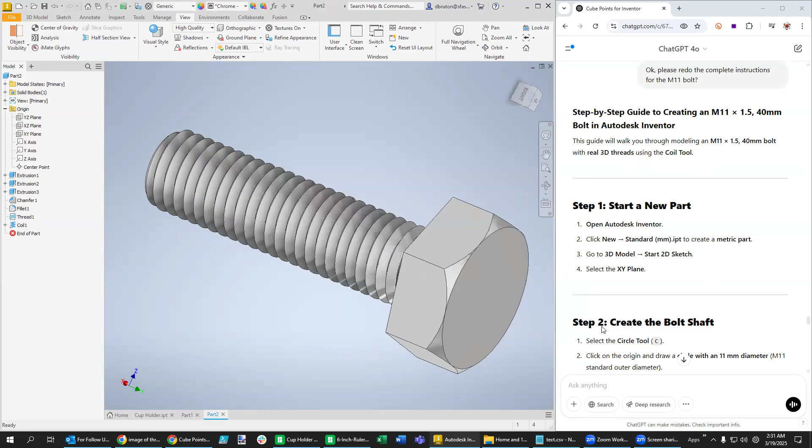So I'm going to follow these along, and we're going to go to metric and use millimeters for this one. The first thing it says is use the XY plane, so we will follow this exactly. So the XY plane, they have over this direction.

And the first thing we want to do here is create a circle. I thought they were going to have us do the hex head first, but it looks like we're going to do the circle first. And since this is an M11 bolt, they're going to have 11 millimeters for the diameter of that shaft.

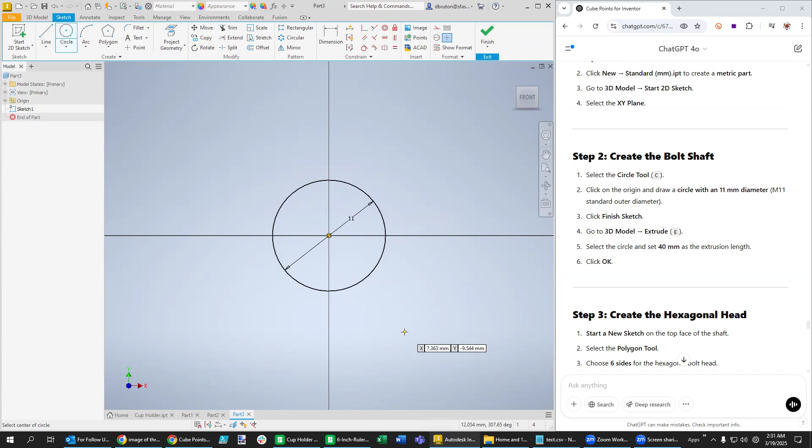And it says then you want to extrude it a distance of 40 millimeters. All right, I guess that's the basics of the shaft.

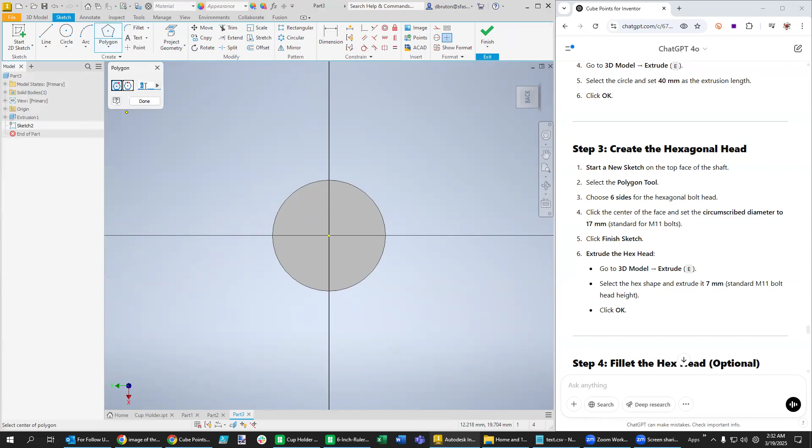Looks like we're going to put the hexagonal head on next. So let me orbit around here, start drawing on that surface. And let's put the hex head on there. Of course, that's located underneath the rectangle tool right here. Make sure it says 6.

And then lock in here, lock up there. And let's see what size we're looking at. All right, it says we want to do 17 millimeters from here over to there. And the reason it says that is circumscribed a diameter to that. So I wonder if we do this and then we type in 17. I guess maybe it's 17 across here. Oh, it's the same thing.

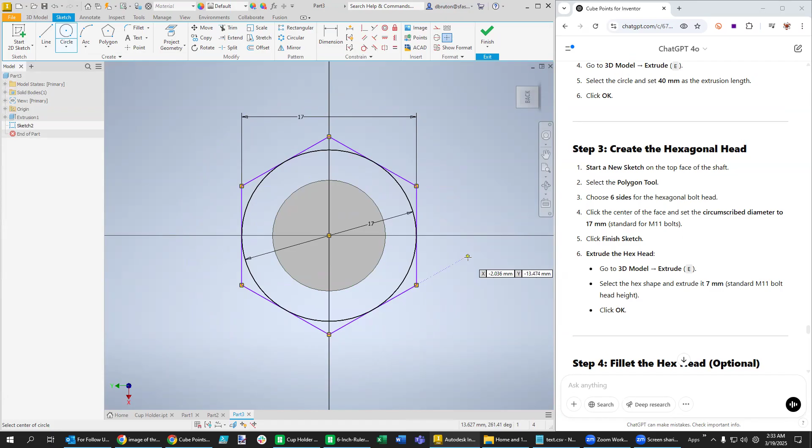Okay, so it's kind of good that I left that there because I want to do something else with that circle in just a moment. So it does look like it's not fully constrained. Let's see if we can find out why. We can say show all degrees of freedom. And it looks like maybe it's just not centered at the origin.

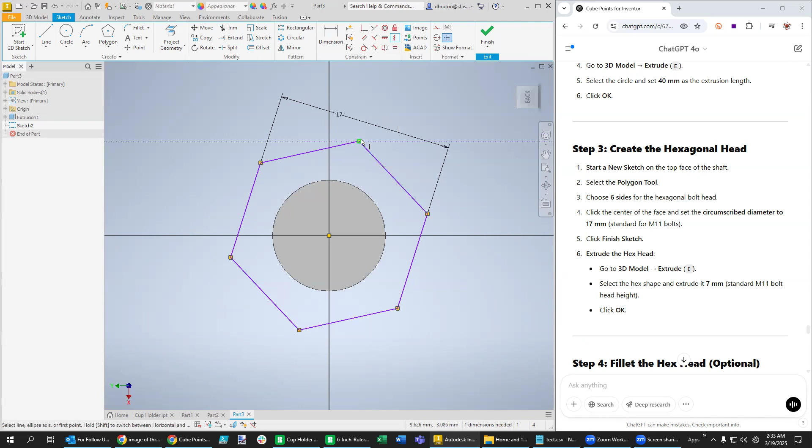So let me undo that and then see if I can move the thing around. What is it that's okay, it's being allowed to rotate. So what we can do on this one is click probably like coincident, or I think vertical might do it. Let's try vertical constraint with this one and that one. And at least that lined it up in one direction. And now you can see on the lower right-hand side, it's fully constrained.

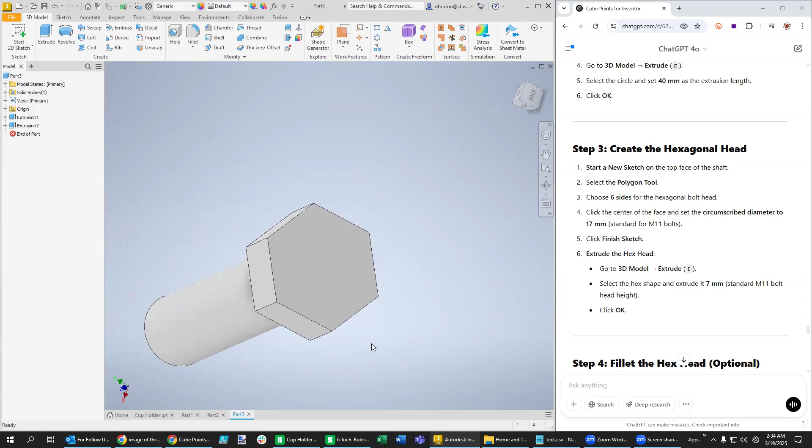Now let's go ahead and extrude. We're going to extrude that only a distance of 7 millimeters for the hex head on this. And we want to give it a little bit of style here. So first of all, let's change the material. The default material, let's change this to polished chrome. So there's chrome polished, it's going to give it a shiny appearance at the end.

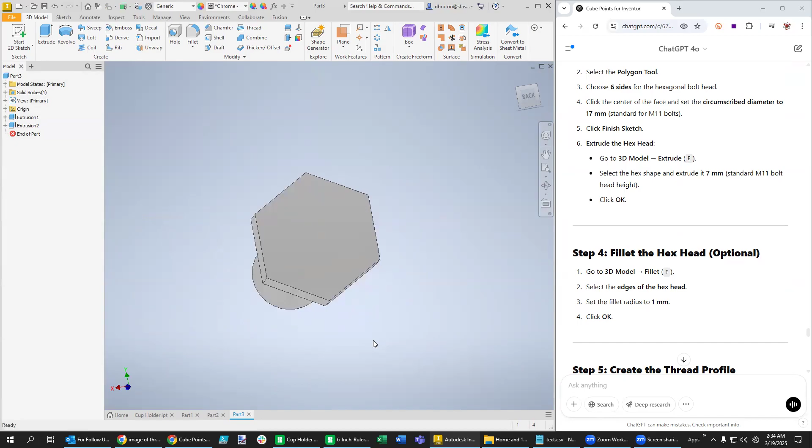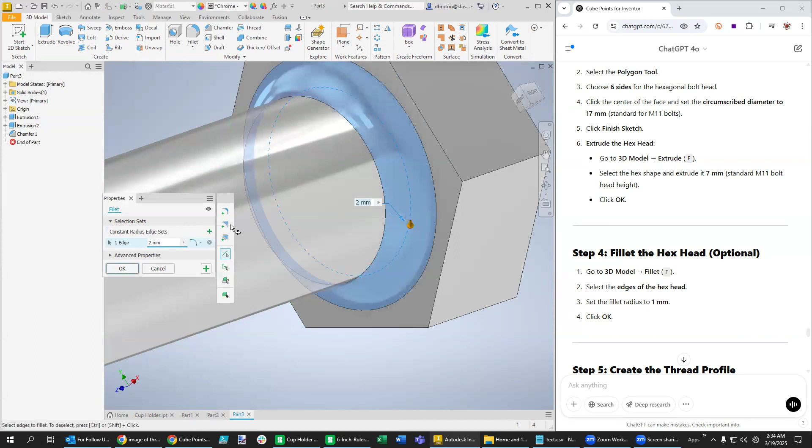And also it kind of describes, I think, some using fillets and things like that. But let's do some of that, but I want to do something a little bit different. So out here at the end, it says that we can put a chamfer out here. Notice you don't have to go up here to select the chamfer, you can just click right there. We're going to do a 1 millimeter chamfer. Then down in here at this intersection right there, we're going to do a fillet instead, and we're going to put a 2 millimeter right there.

Let's give it a little style on top of the head. We don't often see heads that are that sharp, so we're going to use that inscribed circle method. So we're going to do a new sketch right here, and we're going to put a circle and go all the way out here to the edge. And hopefully that's fully defined. That's good.

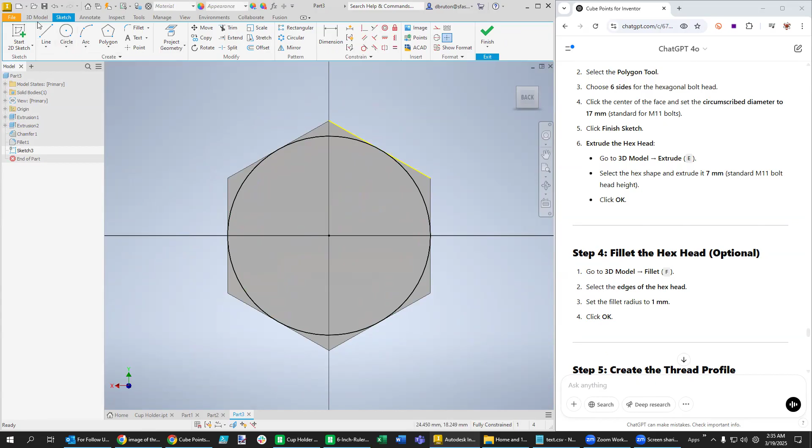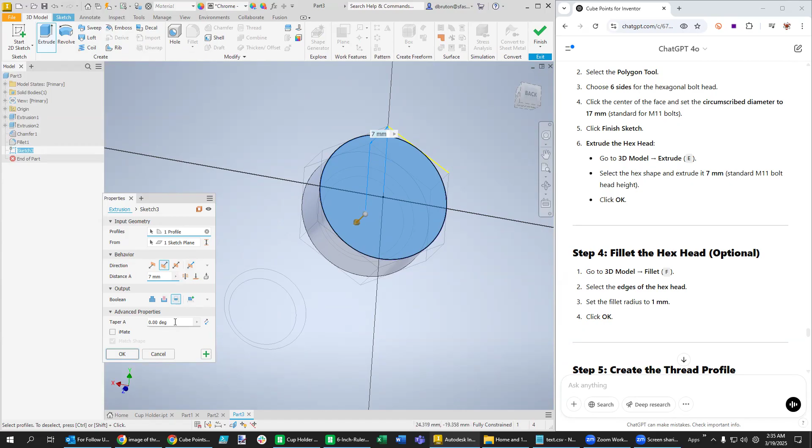And then we're going to use the intersection tool under the extrude. So we have that shape right there, but we don't want to select extrude or cut, we want to do intersection. And what we want to do is flare this out so it kind of takes off a little bit of the edge. So that means under the advanced properties, we can use, I'll put a 45 down here. And you can see that it gives that classic look that we see at the top of bolt heads when we do that.

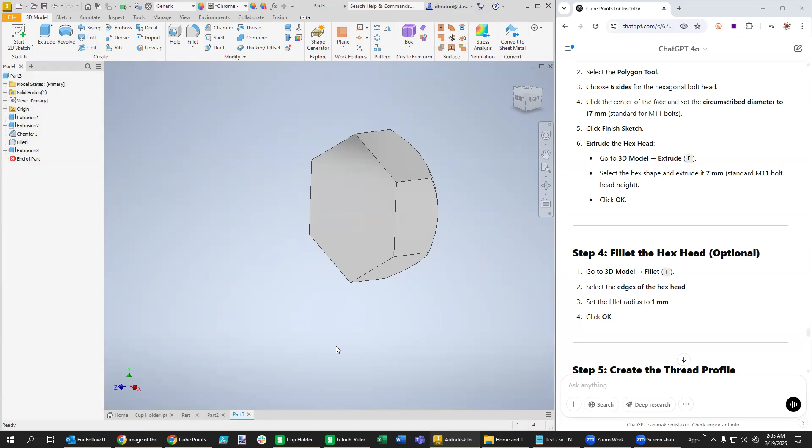So I used the intersection tool, but it looked like I got rid of the shaft that was below that. I guess I should have done this one first then, but that's okay. I guess we can do them out of order or just go back and put it in play. But it does look like that operation... let me see if I can verify that.

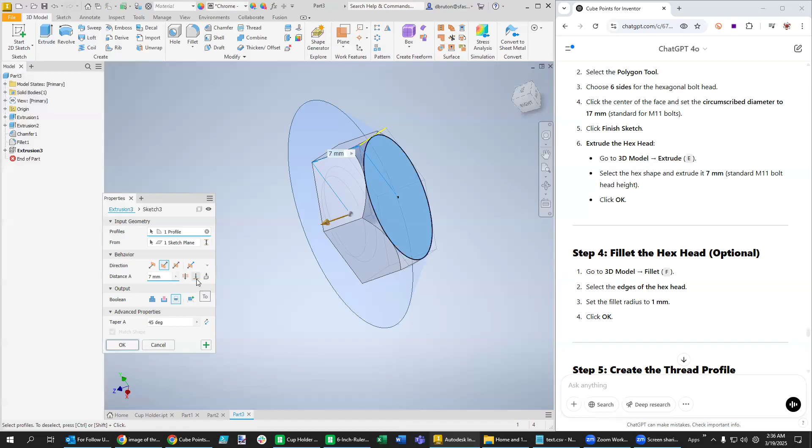Yeah, it looks like it just went all the way through. Maybe I can tell it not to go all the way through, but just to go up to a certain distance. Oh, hey, yeah, how about this? We go all the way through like that.

Okay, now we got the whole thing in play. Looks a lot better. So now, I guess we can put the serial number on top of that and make it even look more realistic, but it's time for the threads, of course.

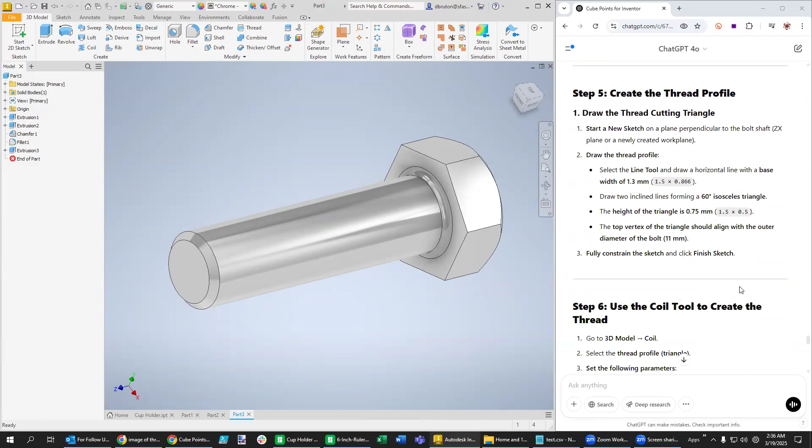And so when you go down to the threads, you could put cosmetic threads on there, but we're going to use the coil and a triangle to cut the threads. So let's face one of these planes. How about, yeah, that one right there. We'll start sketching on that one.

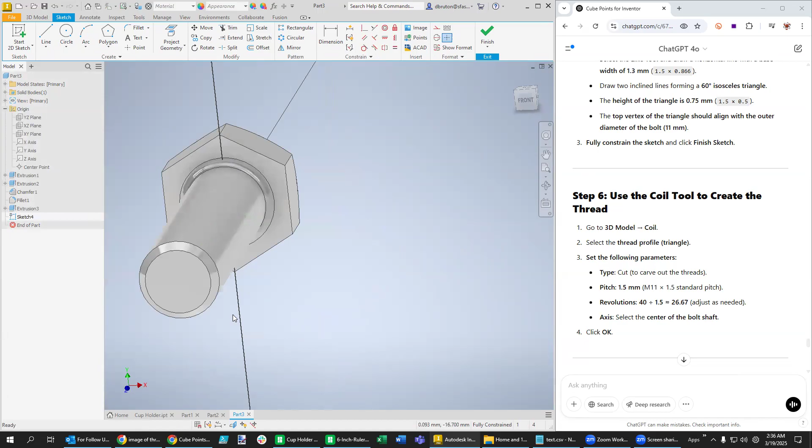And what we want to do is go over, yeah, I forgot to, let's see, one on this plane here. I just want to pan over like this. And I'm drawing on this plane, hopefully. I'm going to start by having just a construction line that starts here and goes out this way. I guess I do need to make that a construction line.

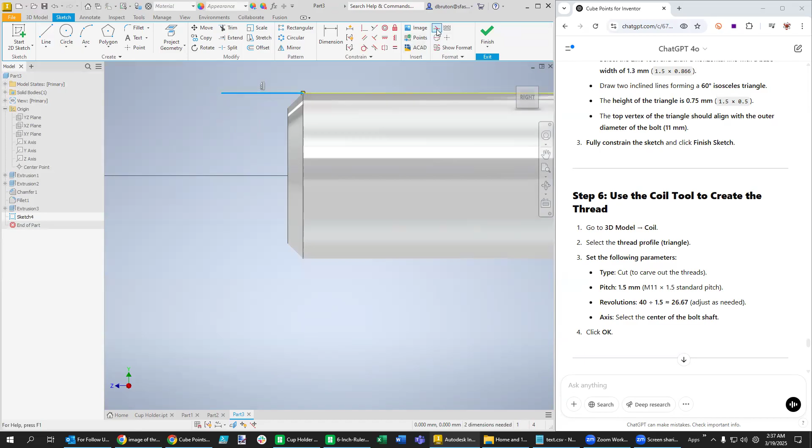And then what we want to do is make a triangle that's going to perform the cut. And hopefully I can get it to line up there. And of course, we want to make these two equal. So let's do that. There's the equal constraint.

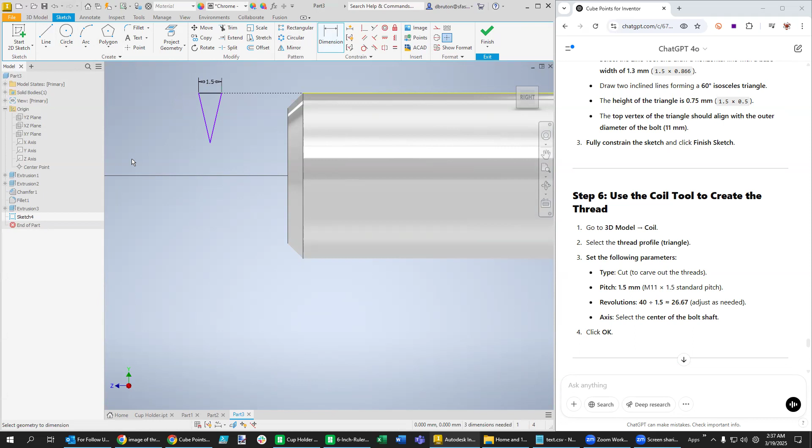And the other thing it talks about is the pitch. Now, if you look up the definition of the pitch, you'll see that it's the distance from there to there. So let's go ahead and put that in place. In reality, we probably want to make it a little bit bigger if we need to have some clearance. So we'll come back and make a note on this video if we need to change that.

The angle between these two should be 60 degrees for a standard thread.

And let's see, what part of it is not fully defined? Thought that would be enough. Let's see if we can figure out what's not fully defined. So go like this. It says it could just kind of move it all over the place.

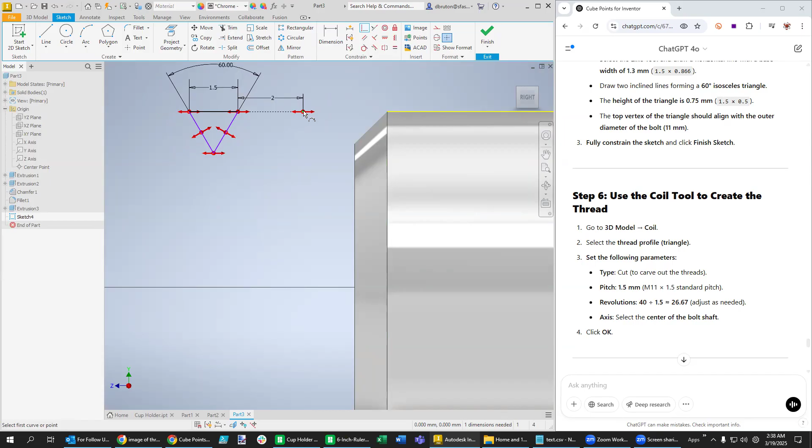Okay, so what that means is that we need to give this a defined length right here. I'm glad that it noticed that, or that got pointed out, because this 2 millimeters that we're going to put from the end of this, I guess I got to lock it into position. We want this point to be coincident with that point there. And you'll see why I'm putting it 2 millimeters from the end in just a moment.

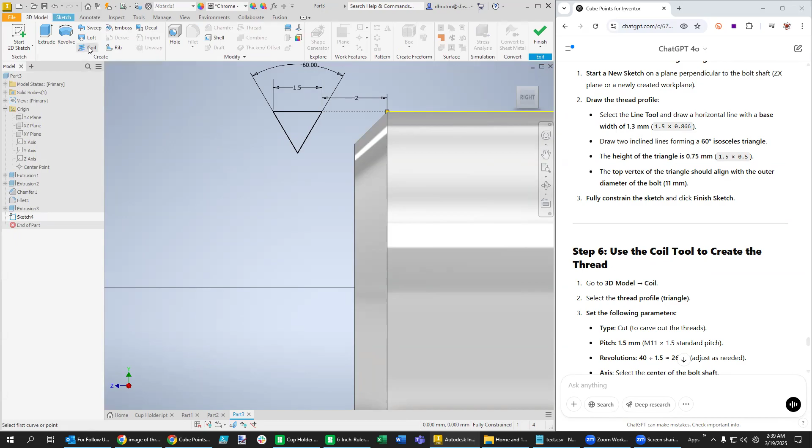Looks like it's going to be time for our cut now. So let's go ahead and begin the spiral coil cut. So notice it already selected the profile as the triangle.

We need to select the axis that we want to go down. And down here, you can see it's going to be the Y axis. So I'm going to select that one. And it's going the wrong direction. So let's see if we can get it to go the other way.

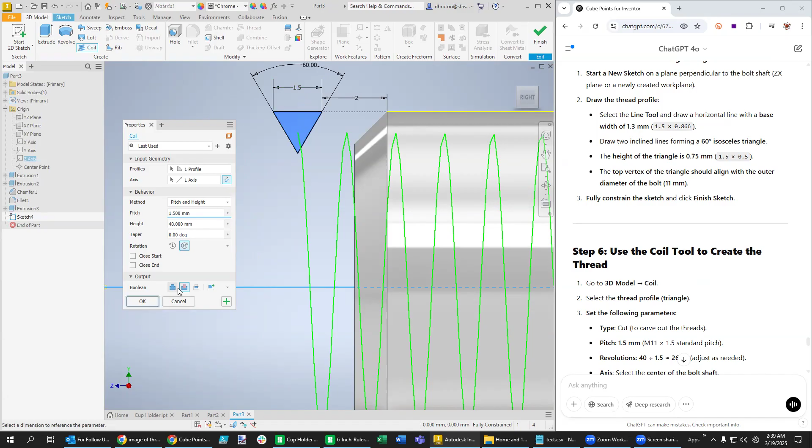That's much better. And I think we want the pitch and the height, because we want the pitch to be 1.5, and there's 40 right here. So if it's not automatically filled in, you certainly want to do that. And I think that's all we really want to do. Make sure it says cut down here so that you end up getting cut threads.

So not only did we notice that the chamfer here at the end will help the bolt go into the nut, but also it looks like that plan of coming just 2 millimeters short of the end makes sure that we don't dig into the hexagonal head. So that's why I used that 2 millimeters.

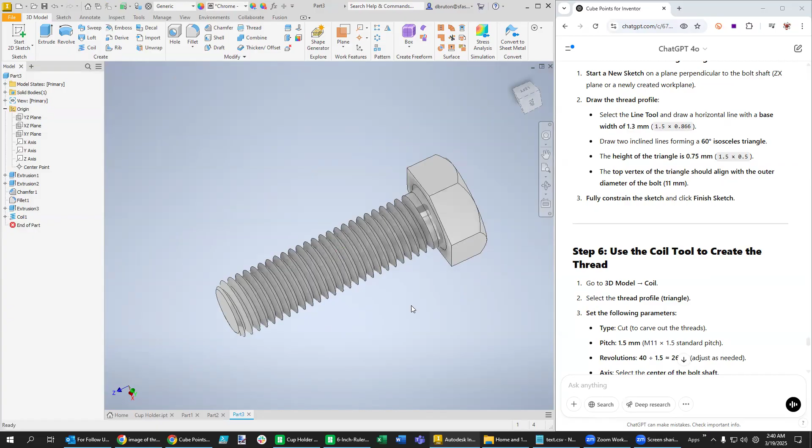All right, that wasn't so bad. Now the trick is going to be to 3D print this and make sure that it's going to function well. We might have to add some more clearance in there. And the question will be, do we want to put the clearance on the bolt or the clearance on the nut? So we'll figure out what the standards are and follow that standard, of course.